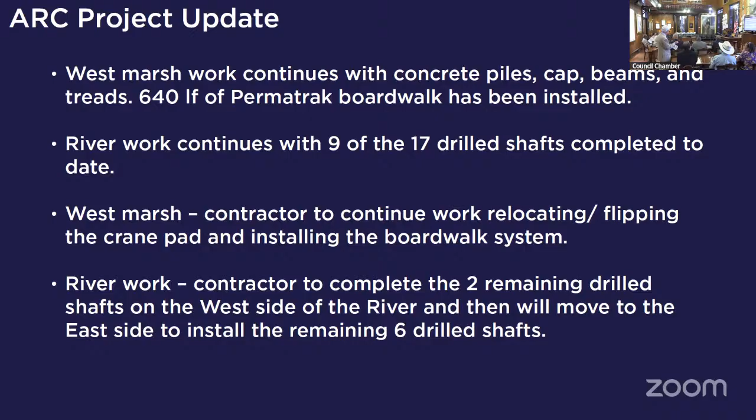On the west side marsh, the contractor continues to work relocating and flipping the crane pad, installing a boardwalk system to get the crane out. And in the river, you see the barges there. The contractor is to complete the 2 remaining drilled shafts into the river, and then we'll move on to the east side. So you see it all taking shape.

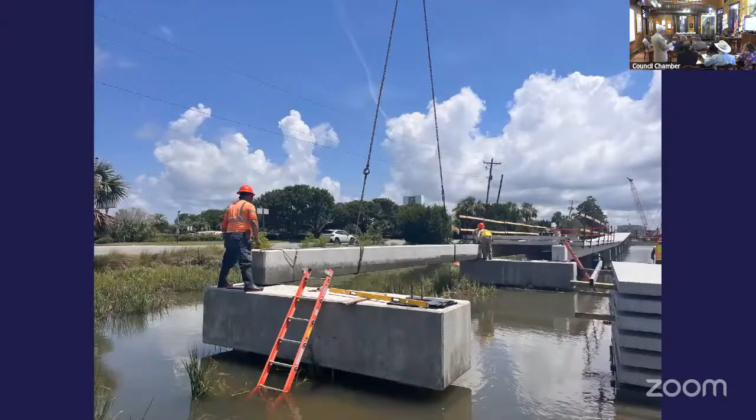Here's some great images, really coming to fruition, and you can see what it's going to look like here in the near future. So happy to answer any other questions or ask Mr. Martin to answer any questions.

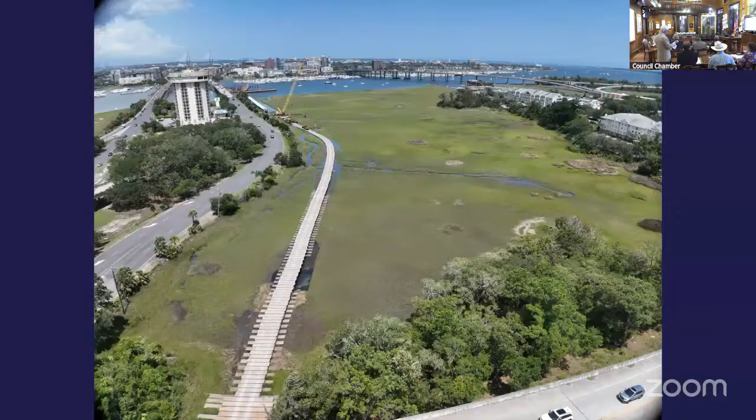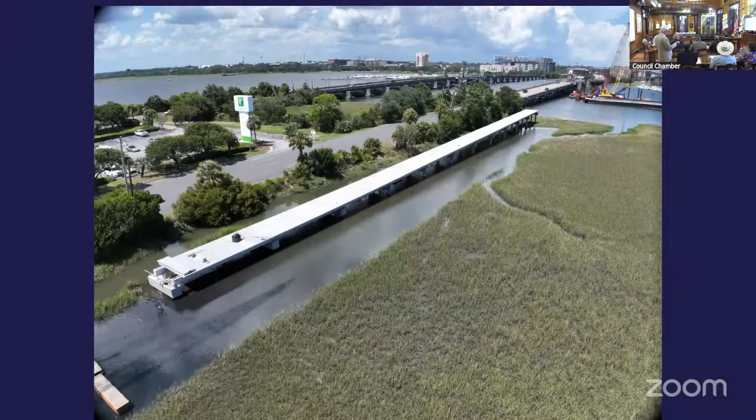Any questions around the table for any member of the committee? Looks like it's coming along nicely. If you drive by, you really can see it. Looks great. Worth the wait. All right, no questions. We'll go on to the next. What do we got next?

Lowline Phase 1 project update. That is Mr. Martin. Good afternoon. The Lowline Phase 1, we are moving forward.

We're now at a final schematic and a pricing set. We will have the first round of pricing done by one week from Friday, and then we'll be able to move toward establishing a GMP that we hopefully will bring back to full council in August. As part of that, we could move out toward construction documents with the groundbreaking still scheduled for the fall.

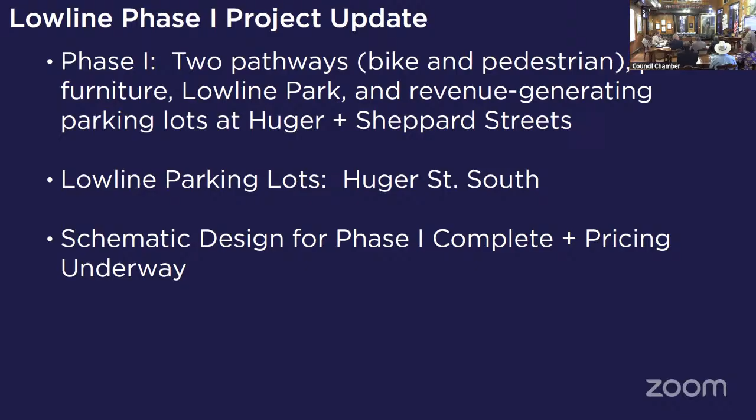Later, we're going to talk a little bit about parking lots at Huger Street South, Sheppard Street South, and Huger Street North. Again, the schematic design for Phase 1 is complete and pricing is underway. So everything is moving along very well. Mr. Martin, as currently being projected, we still remain within budget on what was discussed 3-4 months ago. Yes, thank you.

Okay, any questions on the low line? There is a lot cooking in that corridor that you're going to hear a lot more about tonight at Ways and Means at City Council. Any questions for Mr. Martin on this project? Better start asking because it's going to get going pretty soon. If you got any, better ask them. All right, Josh, thanks, and we'll keep going.

Lowline construction request to accept transfer of ownership and maintenance of the streets from the SCDOT. That's Romney Street, Cypress Street, and our favorite, Huger Street.

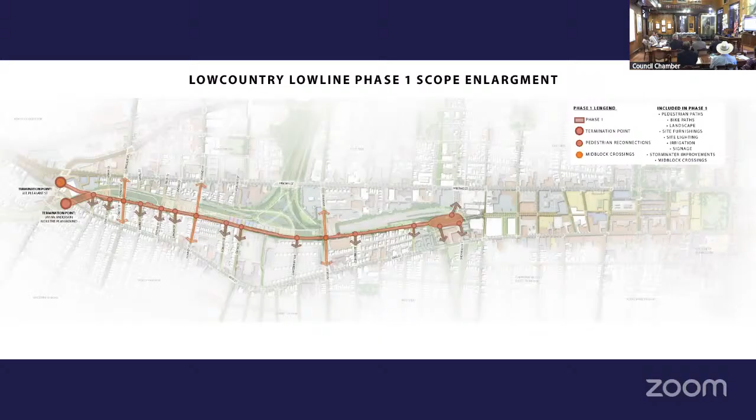The Lowline Phase 1 from the Mount Pleasant line has 3 intersections of true east-west streets: Huger, Romney, and Cypress. As part of that, we are designing mid-block crossings where the paths come across these side streets, for both bike and pedestrian traffic.

We've shifted the lanes of bike and pedestrian, putting the pedestrian against the neighborhood side of the street, because we feel it's a better transition. What we're hoping to build are these mid-block crossings, similar to what we see at Murray Boulevard as part of the Low Battery project, using the exact same materials and palette that we're trying to use now as a template going forward. The cobble may be a little lighter, but other than that, it's pretty close.

That would be good. What we have is kind of a raised platform, so for example you come up and there's a platform. These are pretty much the exact same design as Murray Boulevard, just a little bit larger in area because of right-of-way widths around 30 feet coming through this pathway. So we have 12...

...wide. And what we're asking is for consideration from the committee that if we are not able to get to where we need to be design-wise as part of the DOT, good consideration be given that we take over those three sections from median along those three streets.

So not the whole street, but just that mid-block median. There's also maybe a discussion where we would be doing some streetscaping work along Union Street, between the median and King, as part of the Lowline project. We're starting to identify some funding for that, and that may be another trigger for us to take over that street.

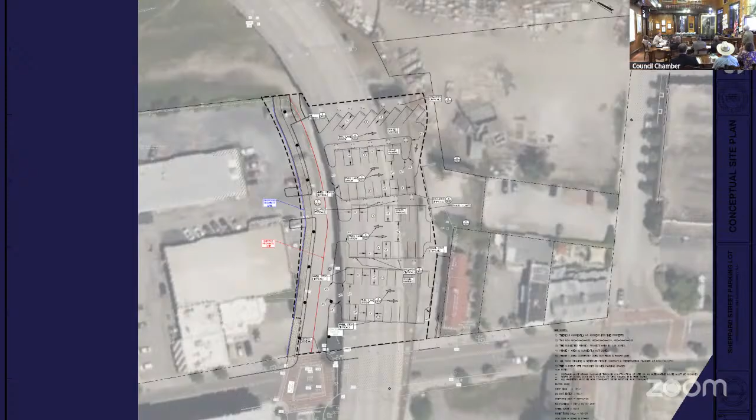Just so you're all aware, he kind of skipped over the fact that we had a capital projects budget allotment for a pretty significant amount for just one of these lots, and we were able to bring in all three for well under. We had $1 million for the Shepherd Street lot, Mayor, for design and construction, and we're doing Shepherd, Huger Street North, and Huger Street South design and construction for $330,000. So that deserves some accolades for staff and Mr. Martin for all their good work. I move for approval.

Got a motion and a second, but before we get there—I was keeping notes, great presentation. I agree with the mayor, this is much needed, it's going to really help this whole project along. I don't think you told us, when we complete all three, how many spaces that represents. All in, it's right at 120 spaces. So, 120 protected, lit, safe spaces that people can use to go on the Lowline, to go into businesses along there—really going to bring a nice edge to that.

I also mentioned, we don't plan to sell monthly passes, except we are working with the businesses so their employees can have monthly passes. We've been working with Joey at Ethos, and Scott, Larry, and the whole gang along Huger Street to make sure this isn't hurting their business, but is actually working with them.

The mayor made a motion and Councilmember Gregory seconded it.

I guess that would be to let people at Ways and Means know that we approve of this at this committee. So on a motion to approve and bring it forward to Ways and Means for funding, any further discussion?

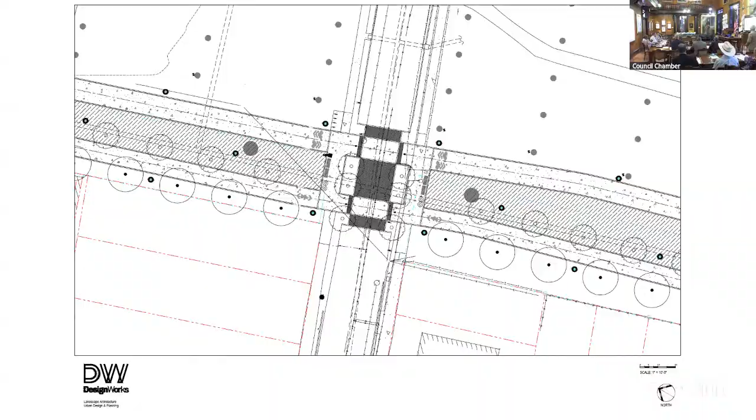If not, all in favor? Aye. If there's any opposed, please be heard now. If none, motion passes. All right, next on our agenda is a chauffeur license appeal of Mr. Simmons.

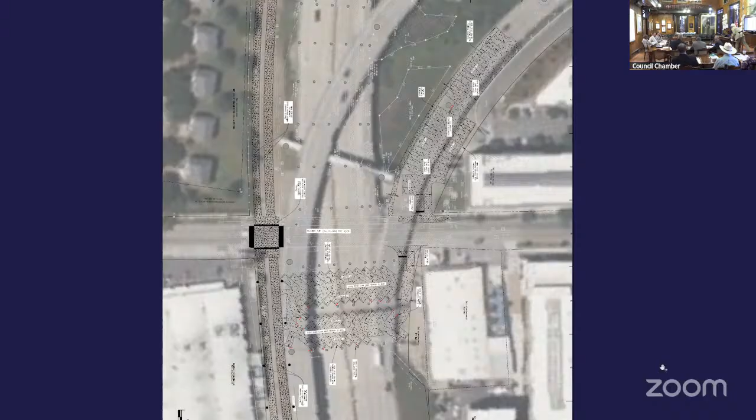My understanding is, and someone from legal maybe just put it on the record, that matter has been resolved. Is that correct? Mr. Rumlin, there you are. Yes, sir, that is correct. I've been working with Mr. Simmons' attorney. He needed one document that we didn't have, and that's since been remedied. So he's going to reapply, and that should take care of that issue. He did send me an email today saying he was withdrawing his appeal.

Okay, so that appeal is at least for now withdrawn. There was some question, I think, why we were beginning today at 3 instead of 3:30. I think it's because of this. We were actually going to have a full appeal, and we didn't. So thank you very much.

Next, Safe Streets and Roads for All, SS4A. Mr. Wallace. Yeah, thank you, Mr. Chairman. As you all know, we've been going through this safety action plan development for the past 8 months, and I've invited Nick Jean from Kimley Horn, who's our consultant, to come here and give a presentation on the action plan and the draft results that they have. Looking to finalize this within the next month or so. All right. Great. Please come forward.

Welcome. Thank you. Thank you for having me. So as James mentioned, I'm Nick Jean with Kimley Horn, the consultant that's been working with the city to develop a safety action plan for the last 7 months or so.

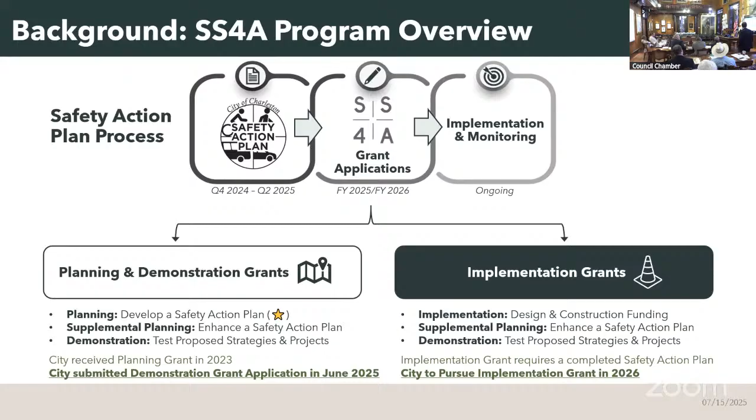So the city so far is focused in this bucket on the left. Ultimately, as part of next year's cycle, the city intends to pursue an implementation grant to fund the projects that you'll see here on the screen in a second.

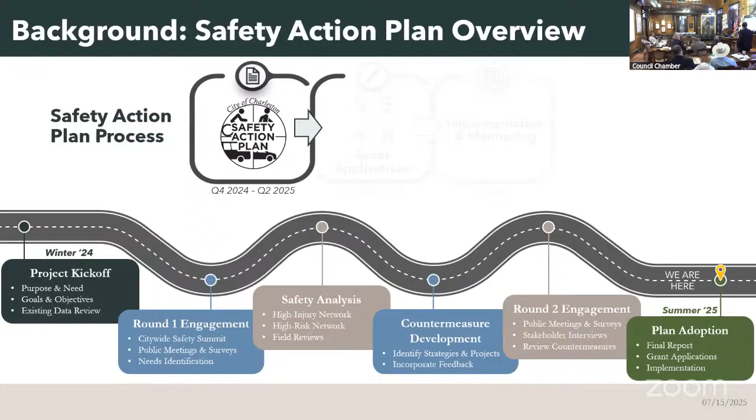Over the course of 7 months, we've worked through this winding road here. We've had 2 rounds of public engagement to gather feedback from the public, both before and after we identified the countermeasures that we intend to implement as part of the plan. And then in the middle, a whole lot of safety analysis, really looking in detail at all of this data that was up on the screen.

I think what's different about this plan from the work that's been done previously is that there has yet to be a plan focused solely on safety that takes this comprehensive look at the entire city. There's been bits and pieces of that incorporated into other plans, but this plan is entirely focused on safety.

Can I ask a question? Yes. When you say 'we,' just for clarity—I apologize for not knowing this—but are you contracted with the city of Charleston or DOT? The city of Charleston. Making sure. Yes, sir.

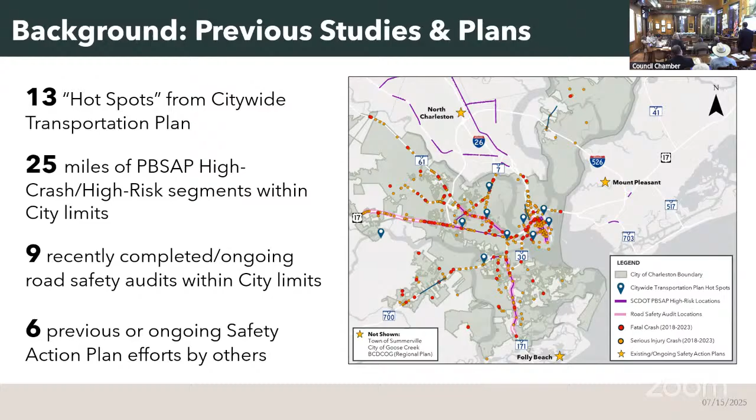Moving on to the goals and objectives of the plan, there are some more numbers at you, because that's what engineers love to do. Some of the numbers you see on the screen informed the goals and objectives of the plan, some of the highlights that we see in the data and what we've heard from stakeholders in the community.

As I mentioned, vulnerable road users—pedestrians, cyclists, motorcyclists—are overrepresented in the injury crashes we see across the city. And if you crunch the numbers, if you're a non-motorist, you're up to 20 times more likely to be injured if you're involved in a crash relative to if you're in a car.

Looking at schools, we have more than 50 public and private schools within the city limits, and nearly 30% of all those red and orange dots I had on the screen before—all the fatalities and injuries—occur within a quarter mile of those schools. The same is true for crashes occurring within disadvantaged communities, which, based on USDOT's definition that we're applying through this plan, are census tracts that are areas of persistent poverty throughout the city. We have 12 census tracts that fit that category.

A good majority of the fatal and serious injury crashes we've seen over the past 6 years have occurred in those census tracts, even though they constitute a relatively small portion by square area of the city.

It's no secret that we have an aging population. The proportion of the population age 55 and older continues to increase, and we know we have lots of non-residents in Charleston throughout the year. To put numbers to that: over 140,000 trips a day are made by people who don't live here.

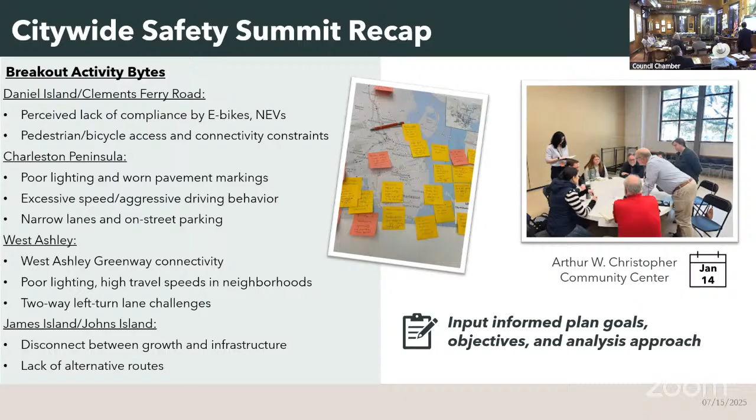Working through the feedback we got from the Safety Summit and stakeholders, along with some initial data analysis, formed this set of 4 goals and objectives for the plan. Number 1: to adopt a safe system approach.

That's an FHWA defined term you can look up online. It's centered around some things we don't always admit. Number 1: crashes are inevitable because humans make mistakes - they're not accidents, which a lot of people call them. There's always something we can do at minimum to mitigate the risk of injuries resulting from those crashes. While we'd like to eliminate crashes altogether, the main focus of this plan is to eliminate those that result in fatalities and serious injuries.

Number 2: to serve the city's many context areas and populations. I mentioned the different types of folks that visit and live here. We also have unique areas throughout the city - we cover a broad area, so what you see on the peninsula is different from Daniel Island, James Island, Johns Island. This plan wanted to give dedicated focus to each of those areas and the issues that exist.

As I showed before, with everything going on across the region, there's fostering this collaboration. We have 6 other plans ongoing, and we've brought those folks together to coordinate as we moved along with this plan. It'll be important that as this plan and their plans are implemented, we're all in collaboration - there are opportunities to pursue additional funding through the SS4A program, and opportunities to take findings from each of these plans and program them into our programs of projects being implemented across the region. The last goal is to establish and maintain a safety culture.

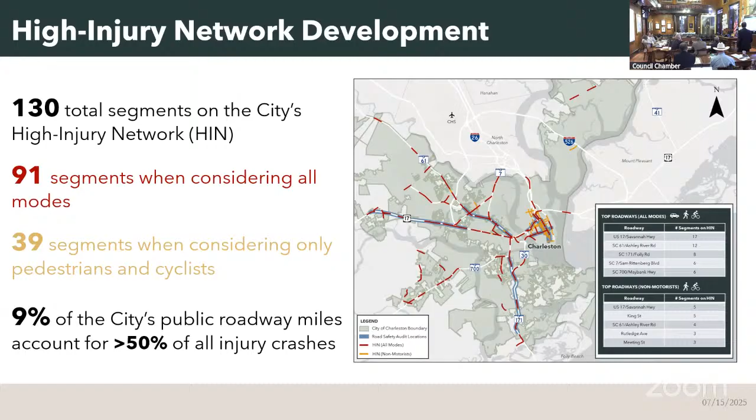On the left is the process we followed to take all of the data and filter it down to these priority locations that we focused on.

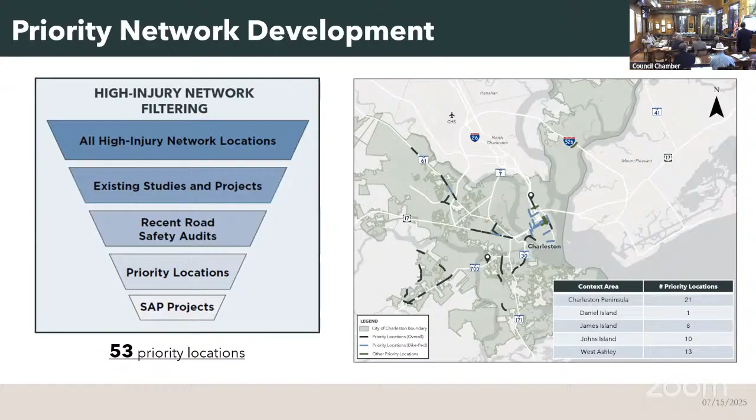So in terms of countermeasure implementation, this is kind of where we're headed and what'll feed into next steps into next year, with applying for future grant dollars, as well as looking to get some of these projects programmed across the region. There are 4 main buckets we organized the proposed countermeasures into: intersection upgrades, pedestrian and bicycle facility upgrades, access management projects, and roadway departure or traffic control device projects. Those last two were lumped together.

So on the screen this conveys the comprehensive nature of what we explored. As part of this process, our consultant team evaluated an inventory of all signalized intersections, as well as all unsignalized and signalized pedestrian crossings, to look for low-cost improvement opportunities—places where we have substandard equipment at signals or markings or signage—to identify those for upgrade and align that with where we're seeing the greatest frequency of crashes.

So a good majority of what is plotted on the screen falls into that bucket. There are also locations that fell in our high injury network where we identified opportunities for other geometric improvements at intersections and so forth. In total, we've got 10 projects that fall into the intersection upgrades area, but that really encompasses 50 to 75 total intersections grouped within individual projects.

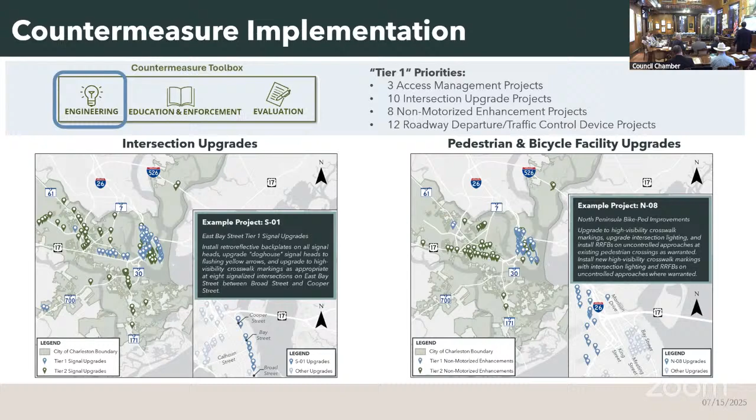Likewise with the pedestrian and bicycle facility upgrades, because a good majority of these are individual crossings where you could implement low cost improvements. We only have 8 total projects, but several of those are many locations bundled into one. As part of this bucket, the city has pursued a demonstration grant through USDOT as part of this year's grant application cycle, to take a subset of these locations and install temporary countermeasures as an opportunity to gather data on how effective those countermeasures actually are before we scale up and implement that across the city.

The last two, we've got access management corridors, which if you were to compare this map on the left to the map where most of the crash history exists and where the high injury network is, there's a lot of overlap there. Because of that, a lot of these corridors overlap with things that have already been explored by DOT that are already included in other program projects. However, it's important that those locations are still highlighted in the plan, as for the plan's goals and objectives to be met, we need to address the crash history occurring in those locations.

And there are still pockets that remain unaddressed, and opportunities to seek funding to address. As you can see in blue there, one is everyone's favorite roadway, Maybank Highway on Johns Island. There's also a pocket on 17 in West Ashley that wasn't included in DOT's RSAs.

The last bucket is these roadway departure and traffic control device projects. Think of that for the most part as your 2-lane roadways that exist across the city. We have a lot of areas that are transitioning that were once rural that are now more suburban or urban in nature, but we've still got these roadways that have narrow shoulders, worn markings, steep ditches, lots of trees. Those locations are generally highlighted here as opportunities to mitigate the frequency and severity of crashes occurring on those roadways.

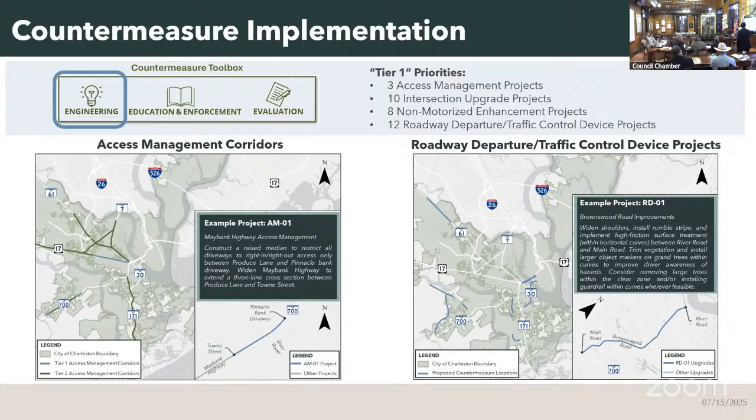The last part only gets one slide, but it's really one of the most critical pieces of the plan, and it's going to take the most effort moving forward: the education, enforcement, and evaluation piece. All of this really folds into establishing a safety culture. We do that at the individual level by creating educational opportunities, making sure folks are aware of the safety issues we face, what they can do to impact those numbers, and also to make sure everyone's aware of what the city is doing, what DOT is doing to impact those numbers. Because I think a lot of times the public doesn't see all the work that's being put in.

This is a short list—there's much more that'll be included in the plan. But as part of this, the city is going to be pushing a Target Zero resolution out at a future city council meeting to formally commit to a target for reducing fatalities and serious injuries on the roadway. Other municipalities across the area have already done this or will do this as well. That helps to really bring accountability to what we're doing, and gives us an opportunity to have something to track against. That's the evaluation piece.

And for all of this to be accomplished, it's going to require partnerships within the community and across different jurisdictions to really make an impact and move the needle across the region.

All right, we're at the end. So next steps: the city submitted the demonstration grant application in June. We're here at the T&T committee meeting now. We're about to distribute the draft report for the safety action plan to our steering committee for review. There'll be a 2-week review period, and then the report will be finalized along with the resolution for Target Zero ahead of a city council meeting in August. Ongoing, the plan doesn't stop here. There's a lot of work to be done in the future, as I covered. So that's all we have.

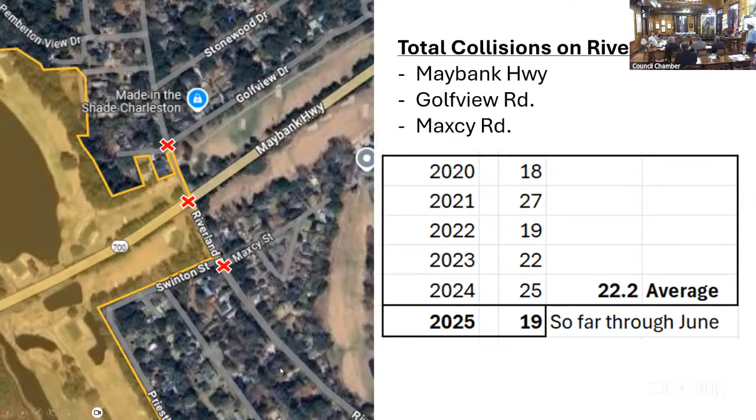Well, first I'd like to thank Councilman McBride for the kind invitation to come here today, and thank you, Mr. Chairman, Mr. Mayor, and all the council members here. We've been working for a while. It's been a godsend and a blessing to have Councilman McBride over on Johns Island now to have a seat at this very important table. We've been working collaboratively for some time. Obviously, we've got a mess on Johns Island and James Island as well, and thought no better opportunity than to come together and work together with the county and the municipalities. We're hand in hand. We're in the same boat for sure.

And I think we've made a lot of progress on this. We have a lot more to do. But this is how it gets done.

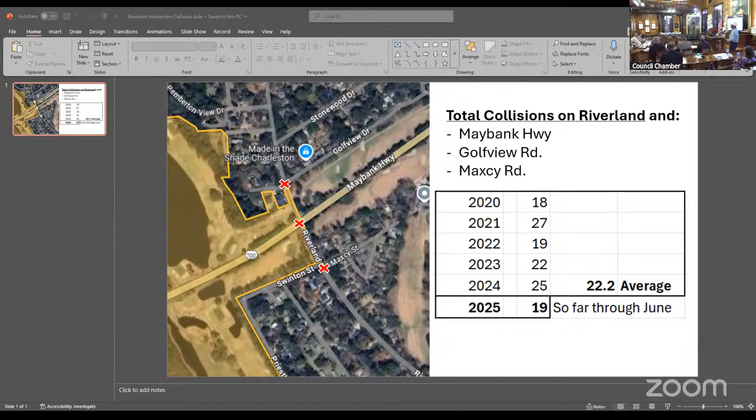And I'm kind of here because I want to hear the ideas that come out of all this. And at this first of these committee meetings I've come to, we do have a potential opportunity in 2026 for another half-cent sales tax referendum. And I'm very anxious to make sure we get good projects on this list. And we certainly have challenges at these intersections. So the more we can work together and come up with some potential projects that might be on that list, now would be the time to get that work done so that they might be available to be included.

Thank you. Thank you, man. Okay, I see Councilmember Brady has his hand up, and then I've got a quick comment. Councilmember Brady, we see your hand up. Yes, thank you, thank you, Mr. Chairman.

I just had a quick question. This intersection's been, I mean, I've been on council almost 6 years, and there were some proposals several years ago, and I guess my question would be, we're talking about short-term solutions. I still don't understand why can't we just hang a no left turn sign on Maybank Highway during rush hour? Because the left-hand turn is the most dangerous maneuver anyone does making a traffic maneuver. So especially during rush hour when those accidents tend to happen because of the increased volume, why can't we just restrict turn movements at that intersection? We do it downtown. There's tons of signs downtown, no right turn, no left turn. Why can't we do this in other parts of the city? Thank you.

Mr. Chairman, if I may, well, Councilman Brady, great minds think alike. This has been discussed, and we do plan on talking about this tomorrow with the county as a potential option. There's some drawbacks to it. There's some concerns that DOT will have over it, which is understandable. There's some concerns potentially that the neighborhood will have over it as well.